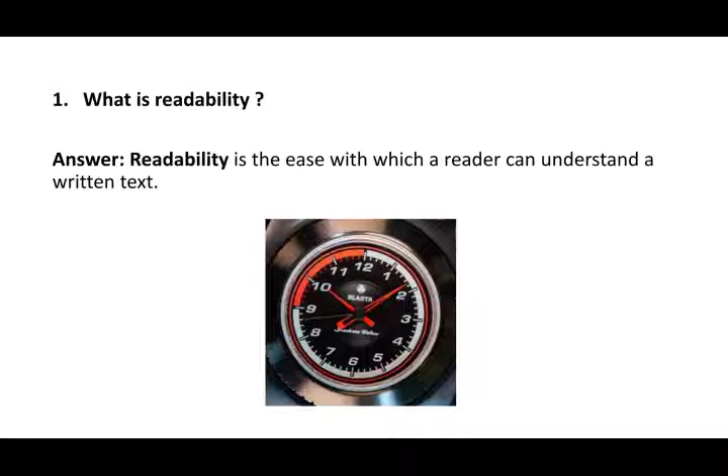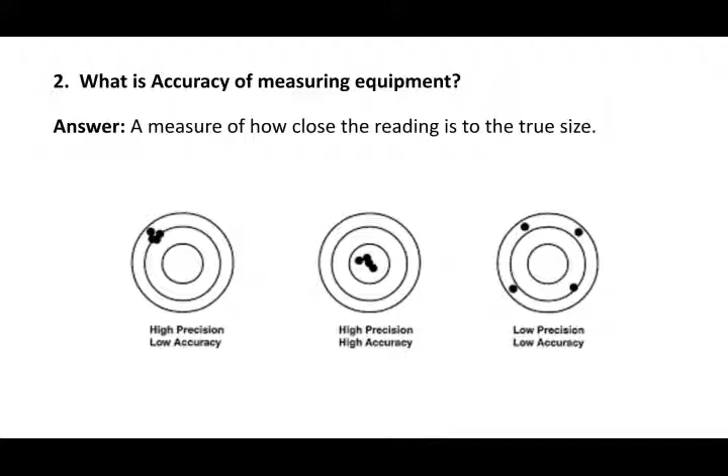Next question, what is random error? The random error in the experimental measurements are caused by unknown and unpredictable changes in the experiment.

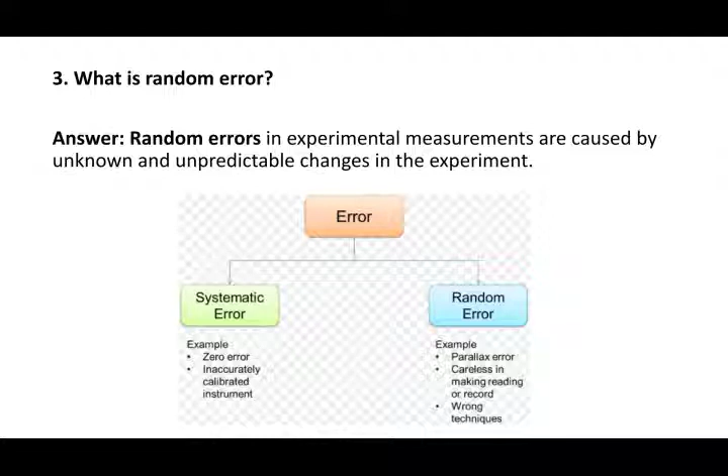In general, we can classify the error as systematic error and random error. Systematic error is due to the inaccurately calibrated instrument, whereas random error is due to carelessness in making readings or records and due to the wrong technique.

Next question, why are tolerances specified? The tolerance is specified because it is not possible to manufacture a size exactly, and that is why the tolerance is provided. The term tolerance refers to the difference between the upper limit and lower limit of the dimension.

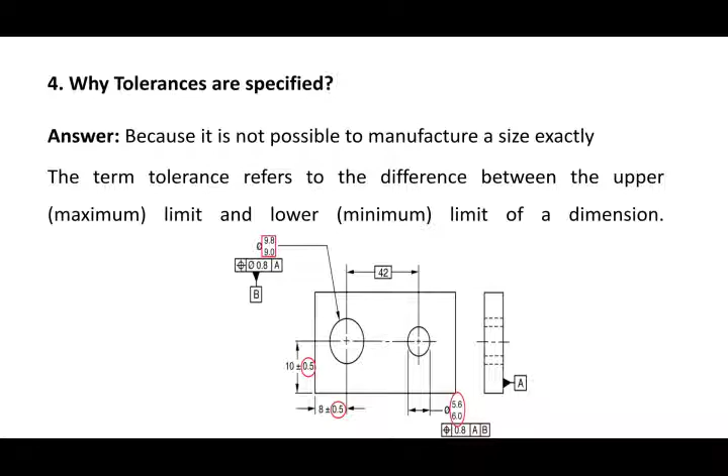Here you can see the diagram. The different dimensions are shown in the diagram. The tolerance is specified by the round circle. Here the dimension is 10 plus minus 0.5. So plus minus 0.5, that is nothing but the tolerance. The maximum limit will be 10.5 and the minimum limit is 9.5, and the tolerance is plus minus 0.5.

Next question, which is the most important characteristic of a measuring instrument in general? The answer is repeatability. Repeatability is the closeness of the agreement between the result of successive measurements of the same measurand carried out under the same condition of measurement.

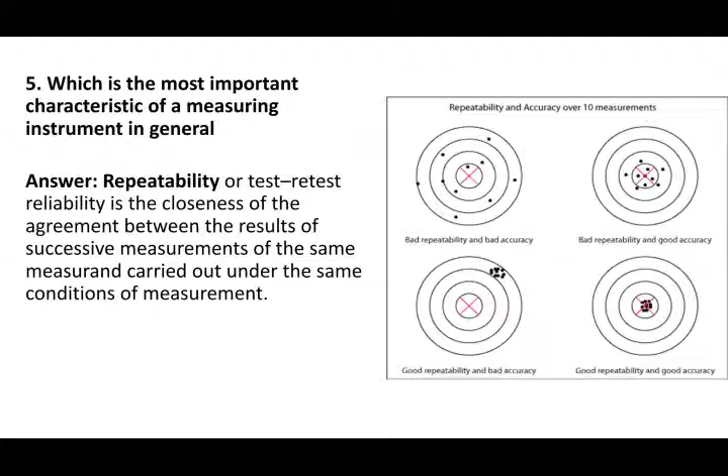In the fourth diagram, all the readings are very close to each other and they are very close to the true reading. Hence it is an example of good repeatability and good accuracy.

Next question, what is the relationship between the sensitivity and range of the measuring instrument? The relationship between the sensitivity and range of measuring instrument is an inverse relationship.

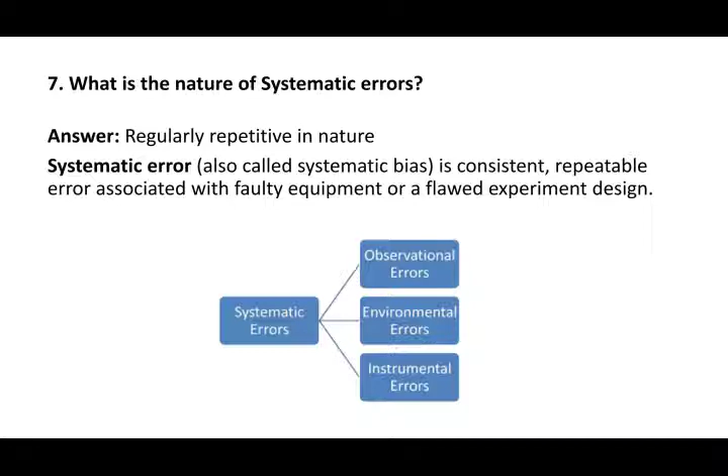Next question, what is the nature of systematic error? The answer is, systematic errors are regularly repetitive in nature. The systematic error is a consistent, repeatable error associated with faulty equipment or a flawed experiment design. You can classify systematic error into 3 categories: observational error, environmental error and instrumental error.

Next question, what is the precision of measuring equipment? The answer is the closeness with which a measurement can be read directly from the measuring instrument, that is known as precision.

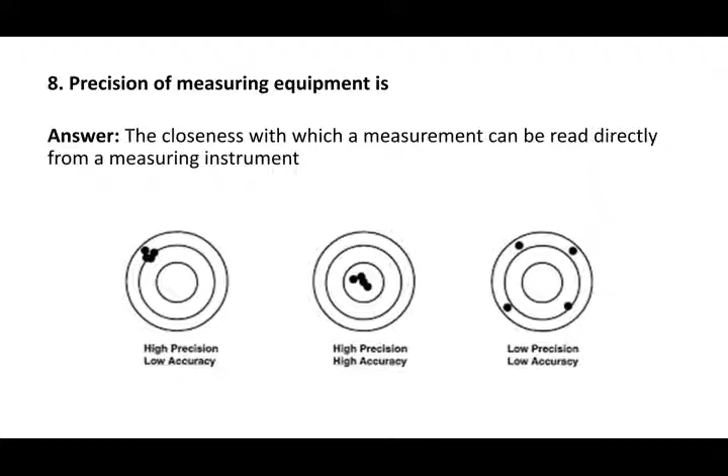Next question: which of the following instruments is most accurate? You have 4 choices: vernier caliper, micrometer screw gauge, optical projector, mechanical comparator. The answer is optical projector, which is used for measuring the profile of the gear tooth. An optical comparator or profile projector is a device that applies the principle of optics for inspection of manufactured parts.

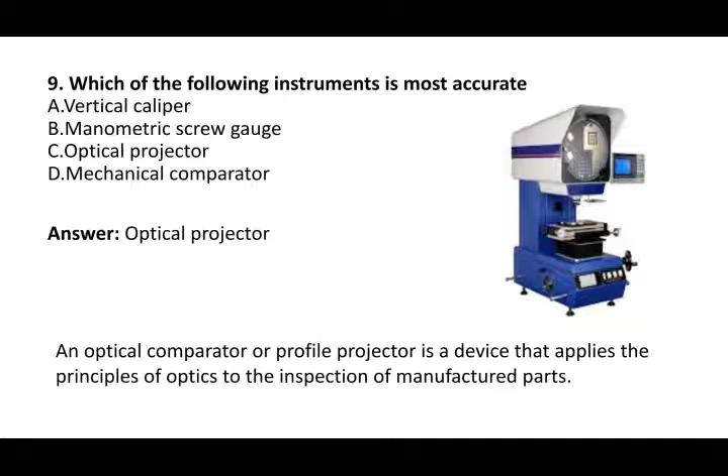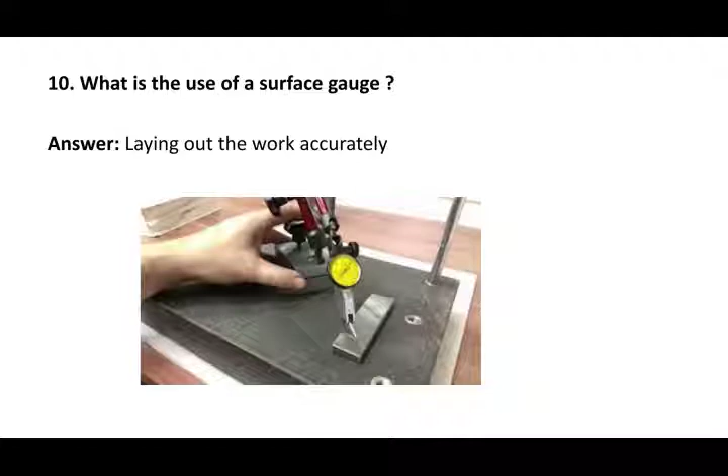Next question: what is the use of surface gauge? Here you can see the surface gauge, and it is used for laying out the work accurately.

Next question: what is parasitic error and how is it caused? The parasitic error is error in computation, the incorrect execution of the measurement.

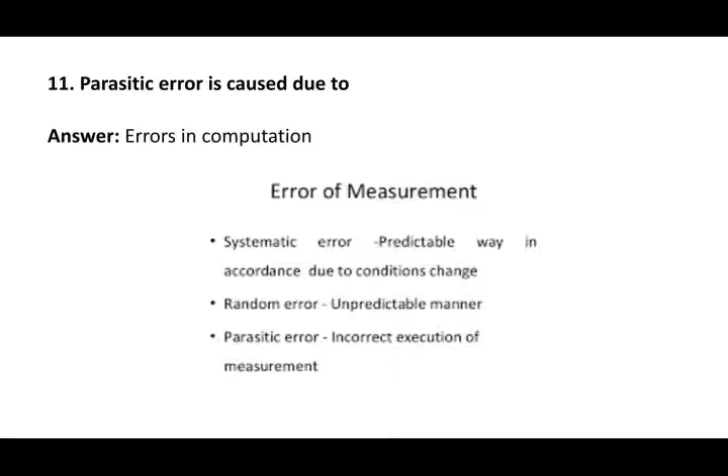Next question: what is the use of feeler gauge? It is used to measure the thickness of the clearance. In the second diagram you can see the feeler gauge, with different blades, used to measure the thickness of clearance. In the first diagram there is a clearance between the cam and the follower, which we can measure with the help of the feeler gauge.

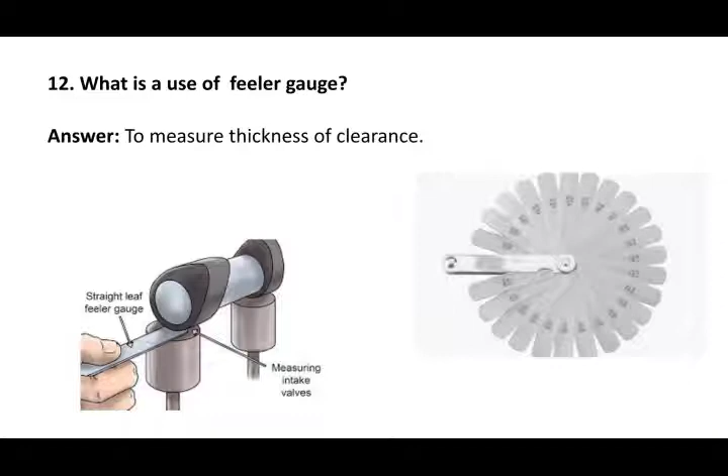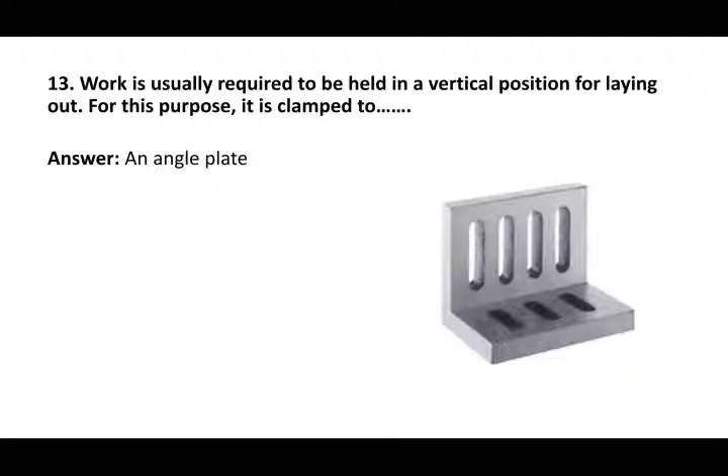Work is usually required to be held in a vertical position for laying out. For this purpose it is clamped to an angle plate. Here you can see the angle plate, used for holding the work in a vertical position.

Which device is used to check the thickness of light gauge sheet steel? The answer is micrometer. Here you can see the micrometer. The steel sheet is held between the anvil and spindle, and we can measure its thickness with the help of the main scale and vernier scale.

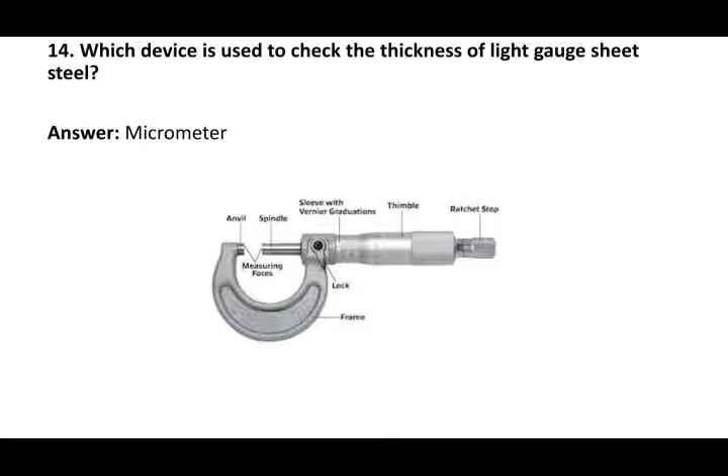Next question: what is the sensitivity of a measuring instrument? The answer is the smallest change in the signal that can be detected, known as sensitivity - a measure of change in output of an instrument for a change in input. High sensitivity is desirable in the instrument. Sensitivity must be evaluated together with other parameters such as linearity of output to input, range and accuracy. The value of sensitivity is indicated by the transfer function.

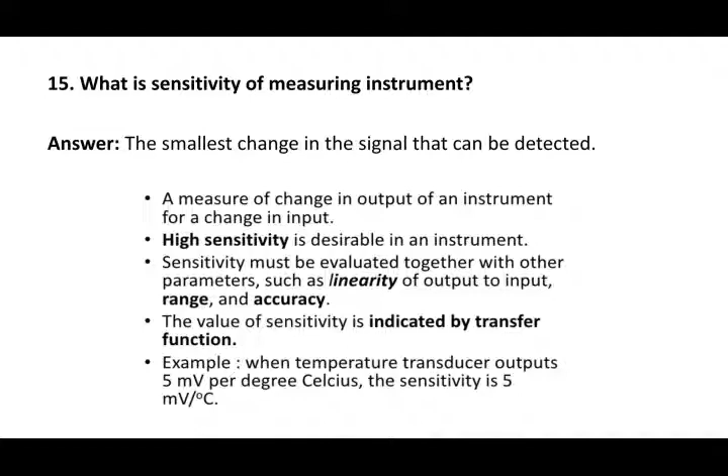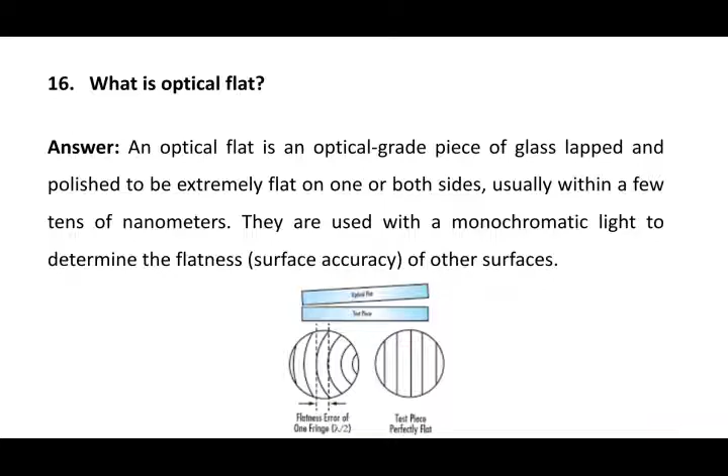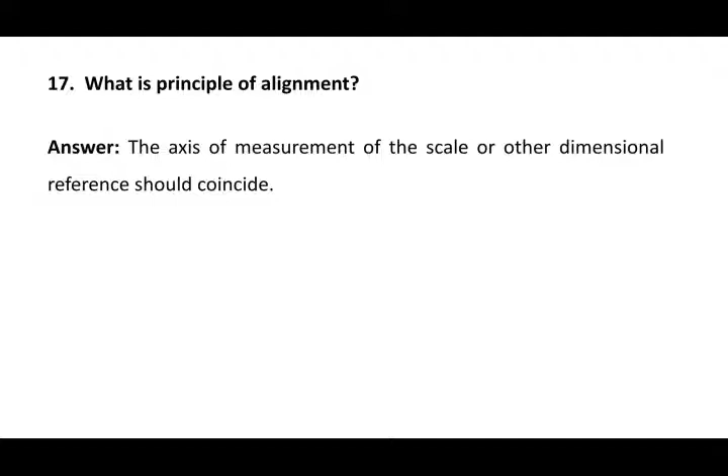Next question: what is the principle of alignment? The axis of measurement of the scale or other dimensional reference should coincide - that is the principle of alignment.

Next question: what is repeatability of a measuring instrument? The answer is the capability to indicate the same reading again and again for a given measurement - that is known as repeatability, the capability of the instrument to indicate the same reading again and again.

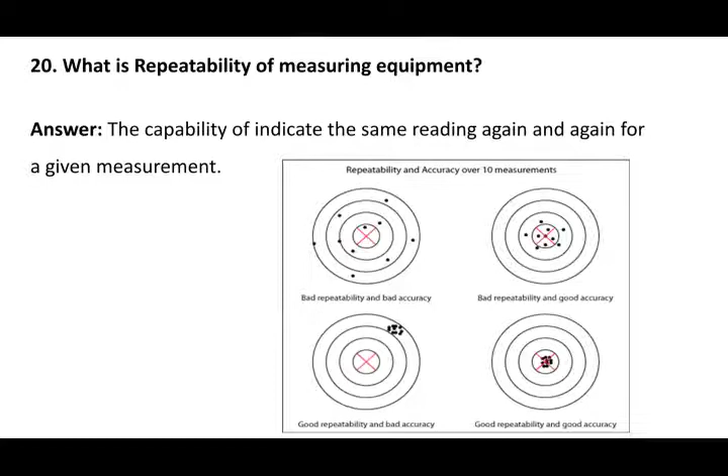What is the purpose of ratchet screw in a micrometer screw gauge? In this diagram you can see the ratchet screw, and it is used to maintain a sufficient and uniform measuring pressure. Whatever workpiece you want to measure is held between anvil and spindle, and with the help of ratchet screw we can apply sufficient uniform pressure so as to measure its thickness or diameter.

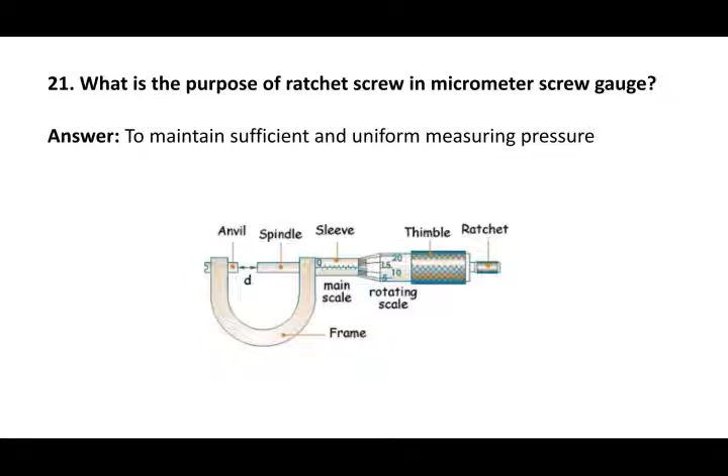External taper can be accurately measured with the help of sine bar and slip gauges. Here you can see the sine bar, and with the help of sine bar we can measure the external taper.

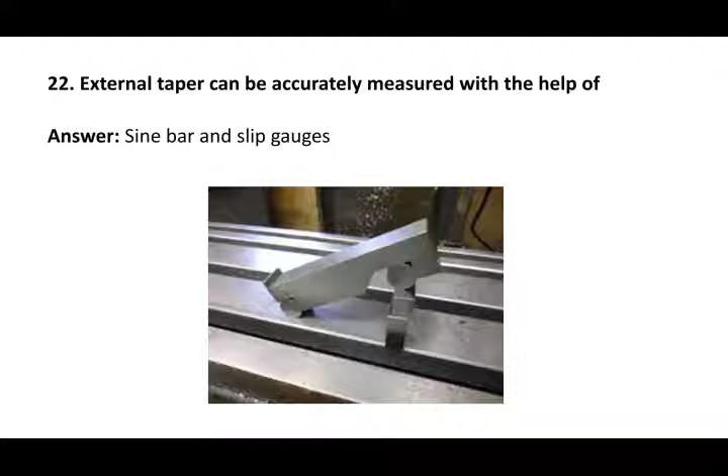A sine bar is specified by the center distance between the rollers. Here you can see the sine bar, and it is specified by the center distance between the rollers.

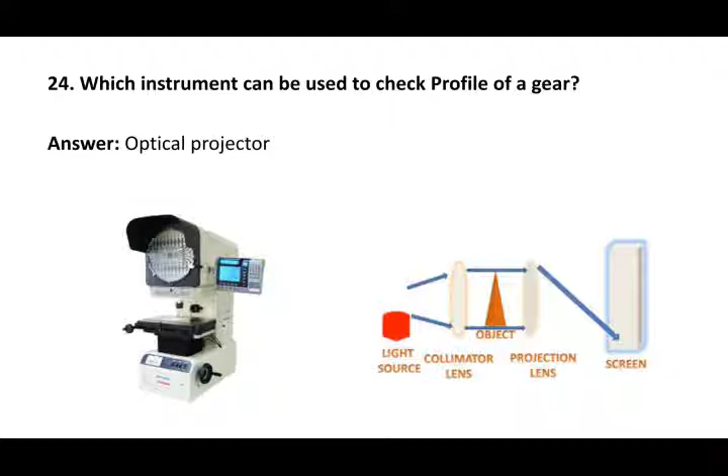The M and E system in metrology are related with the measurement of surface finish. The M and E system in metrology is related with the surface finish.

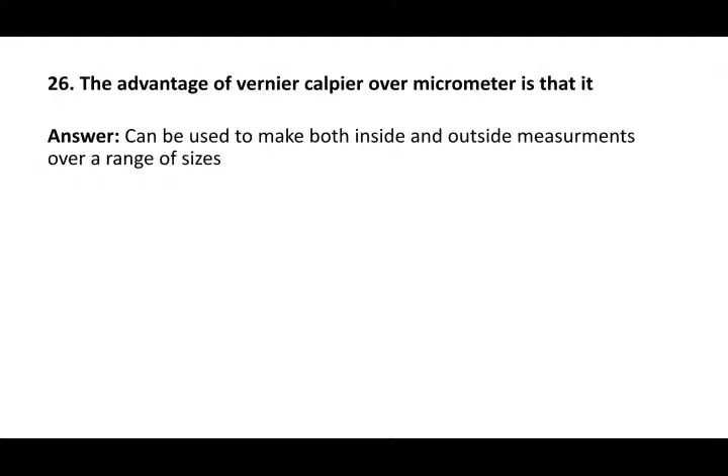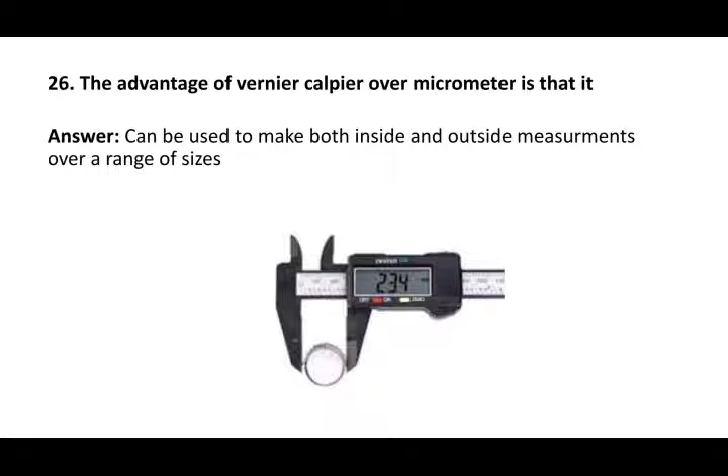The advantage of vernier caliper over the micrometer is that it can be used to make both inside and outside measurement over a range of sizes. With the help of vernier scale we can measure outside dimension as well as inside dimension. While measuring the outside dimension we hold the object in the lower jaw, whereas while measuring the inside dimension we measure the workpiece with the help of the upper jaw.

The combination set can be used to check the angular surfaces. What is the use of combination set? The combination set is used to check the angular surfaces.

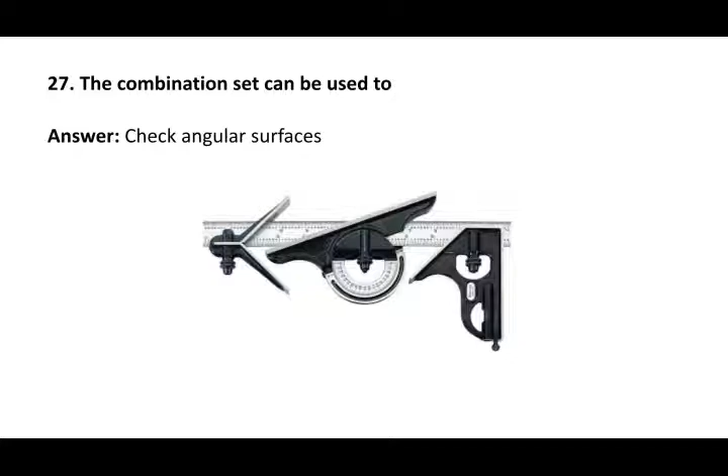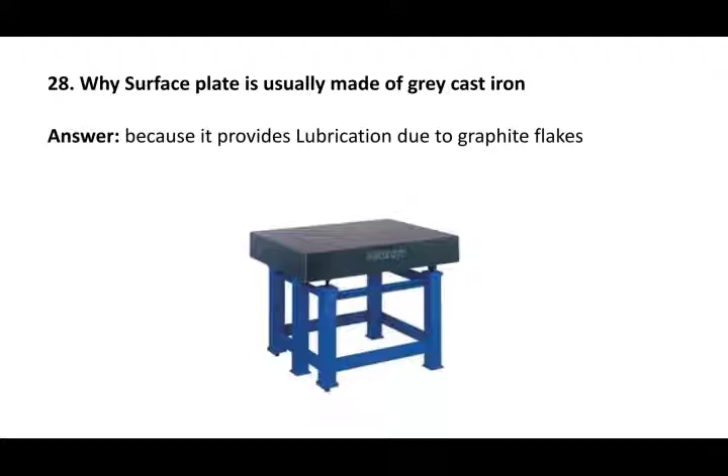Why is surface plate usually made of grey cast iron? Here you can see the surface plate, and why it is made of grey cast iron - the answer is because it provides lubrication due to the graphite flakes.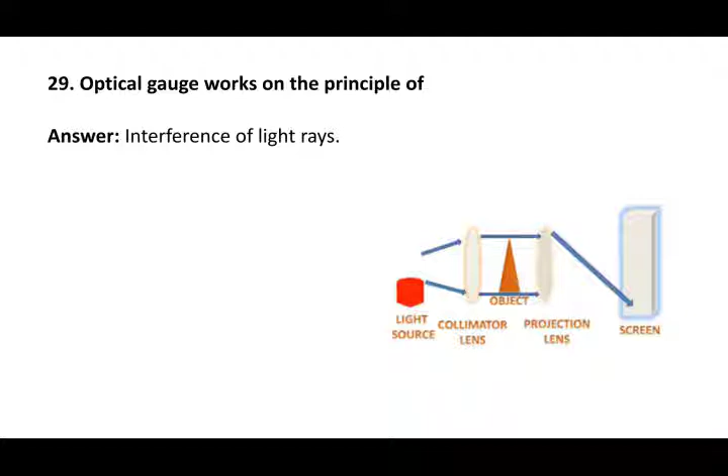Optical gauge works on the principle of interference of light.

Define the error of measuring equipment. The answer is the difference between the measured value and the actual value. So error can be defined as the difference between the measured value and the actual value.

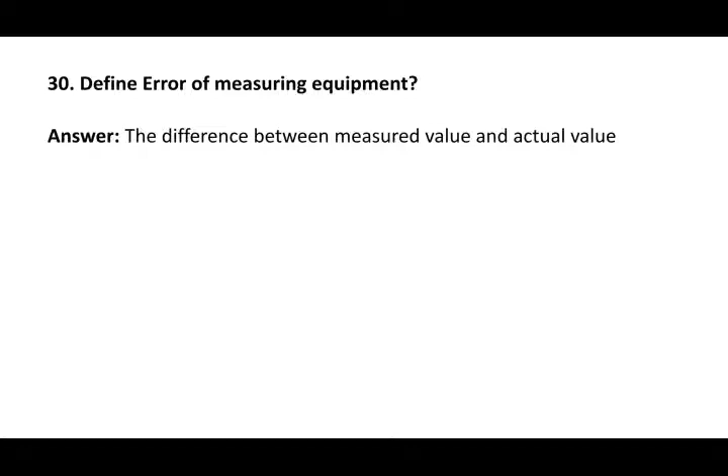What is the accuracy in the measurement? It is an agreement of the result of a measurement with the true value of the measured quantity. That means how close your reading is to the true value, that is nothing but accuracy of that measuring instrument.

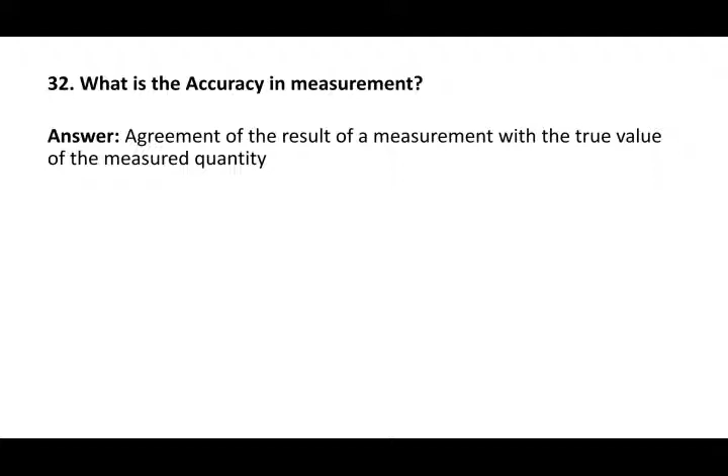How are two slip gauges in precision measurement joined? There is a process for joining the slip gauges. While carrying out the measurement activity, you have to join different slip gauges. The answer is wringing. Wringing is the process of sliding two blocks together so that their faces bond. Because of their ultra flat surfaces, when wrung, gauge blocks adhere to each other tightly. Here with this diagram you can see the wringing process, and the two slip gauges are joined together with the help of the wringing process.

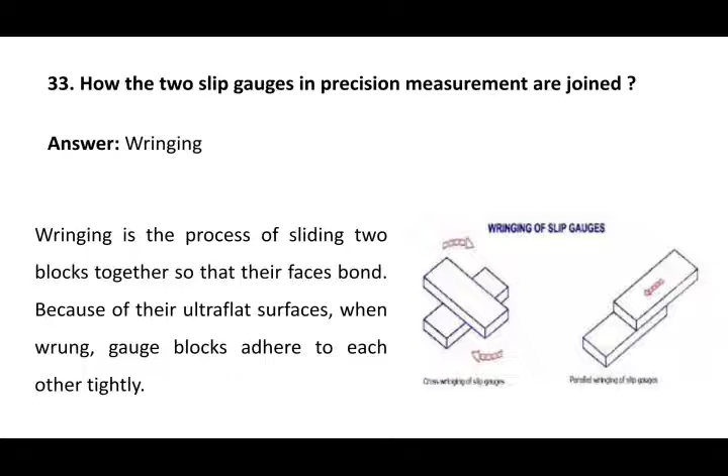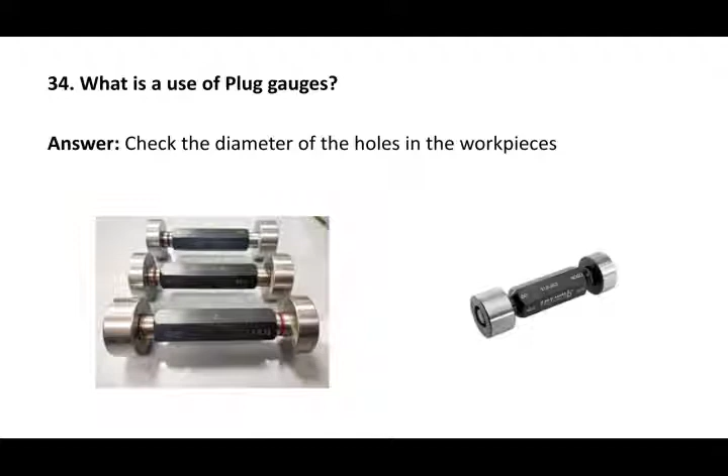What is the use of plug gauge? The plug gauge is used to check the diameter of the hole in the workpiece, specifically the internal diameter of the hole.

Define the term allowance in limits and fits. Allowance is nothing but the minimum clearance between the shaft and hole, that is known as allowance. Here in this diagram you can see the allowance.

Again, you can see the maximum clearance. The maximum clearance is nothing but the maximum dimension of the hole and the minimum dimension of the shaft, that is the maximum clearance. Whereas allowance is the difference between the minimum dimension of the hole and maximum dimension of the shaft, that is known as allowance.

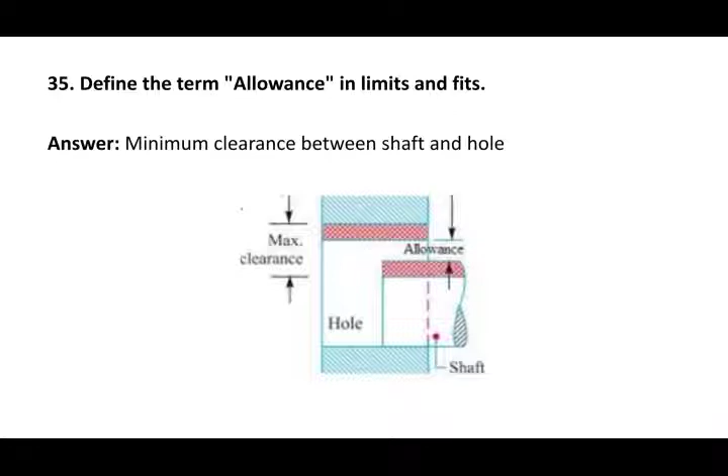Next question: the ISA tolerance system consists of the following number of quantities of tolerance and grade of fit respectively. The answer is 16, 21. So in the ISA system there are 16 tolerances and 21 grades of fit.

Next question: surface roughness on a drawing is represented by which symbol? The surface roughness on the drawing is represented with the help of triangles. There may be 1, 2, 3, 4, or 5 triangles, and depending on that triangle you have to maintain different surface roughness.

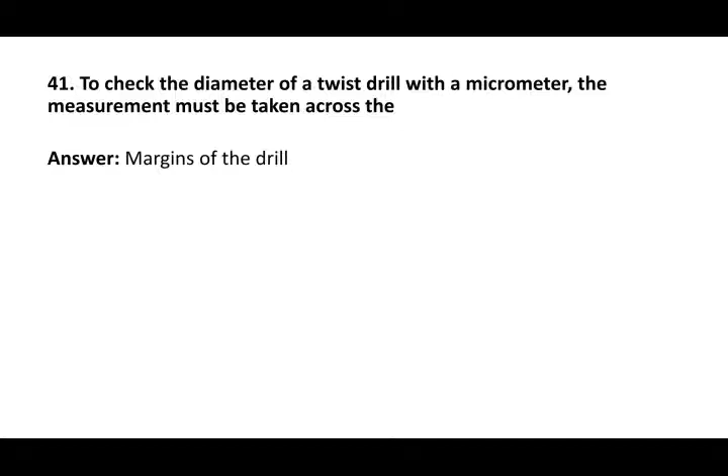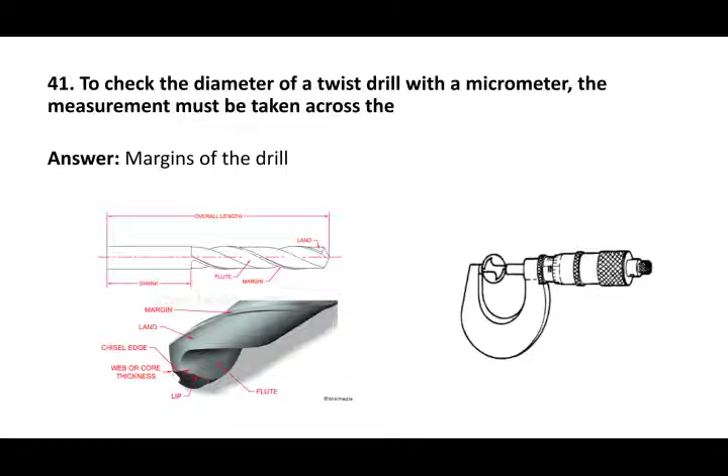Next question: to check the diameter of a twist drill with a micrometer, the measurement must be taken across. The answer is the margin of the drill. In this diagram you can see the margin of the drill, and if we want to measure the diameter of the twist drill, we have to hold the drill bit over the margin with the help of a micrometer screw gauge, and then we can determine its diameter.

Next question: straight edges are used to measure. The answer is flatness. Whenever you want to measure the flatness, you have to use the straight edges.

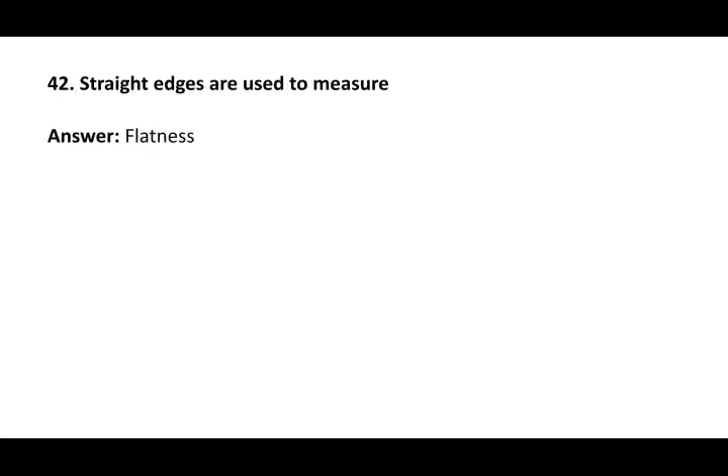Next question: what is the purpose of Eden-Roll? Here you can see the Eden-Roll, and its purpose is to calibrate the slip gauges. It is used for the calibration purpose of the slip gauges.

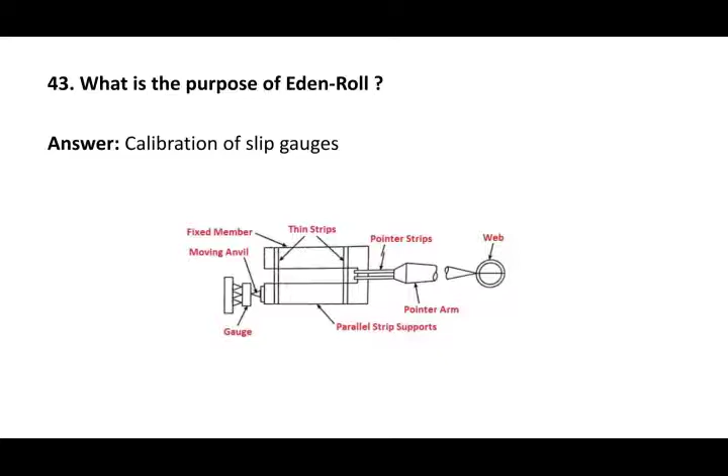Next question: what is the use of bevel protractor? Here you can see the bevel protractor. The answer is to measure the angular measurements.

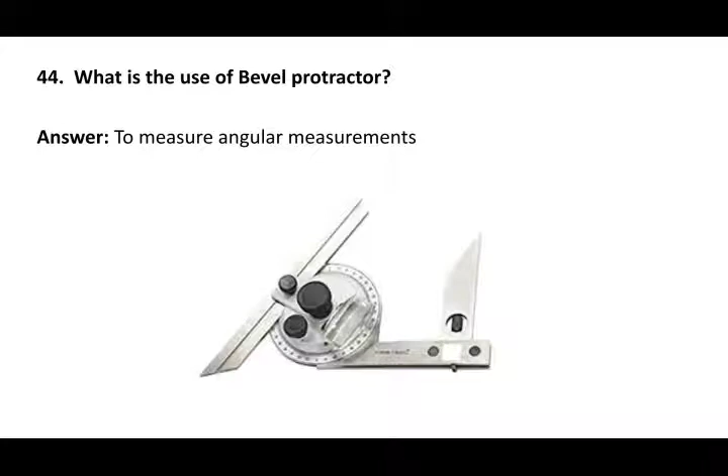Next question: what is a clinometer? The answer is the clinometer is used to measure the height of tall things like buildings, flagpoles, trees. A clinometer is a tool that is used to measure the angle of elevation, or the angle from the ground in a right angle triangle. You can use a clinometer to measure the height of tall things that you can't possibly reach the top of, like flagpoles, buildings, trees.

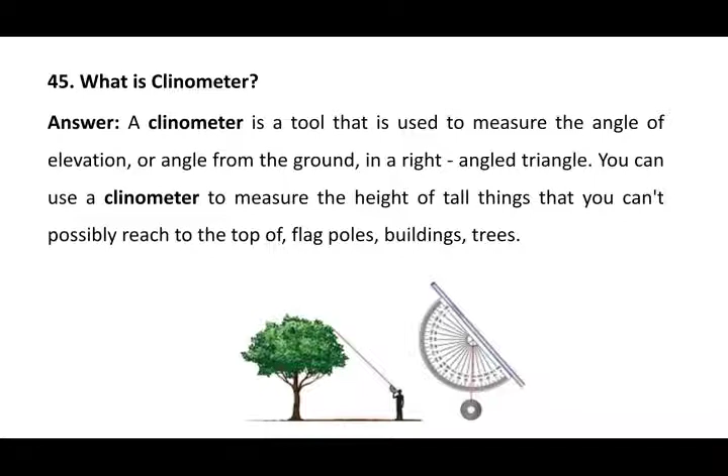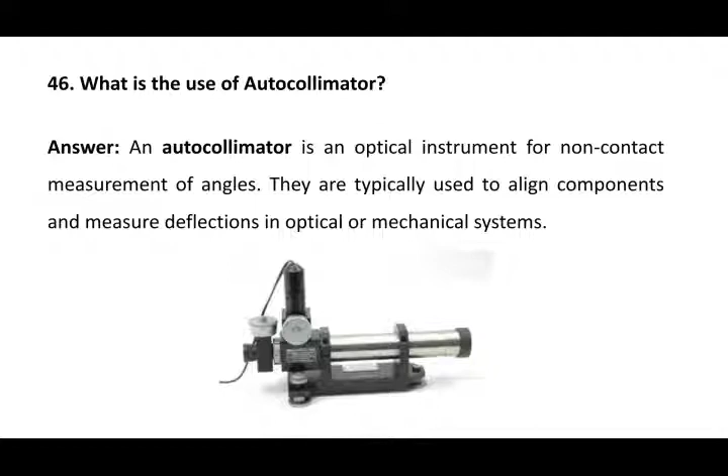Next question: what is the use of an autocollimator? Here you can see the autocollimator. An autocollimator is an optical instrument for non-contact measurement of angles. They are typically used to align components and measure deflections in optical or mechanical systems.

Next question: what is the purpose of the Wickman gauge? Here in this diagram you can see the Wickman gauge, and they are used to measure the screw threads. So the purpose of the Wickman gauge is to measure the screw threads.

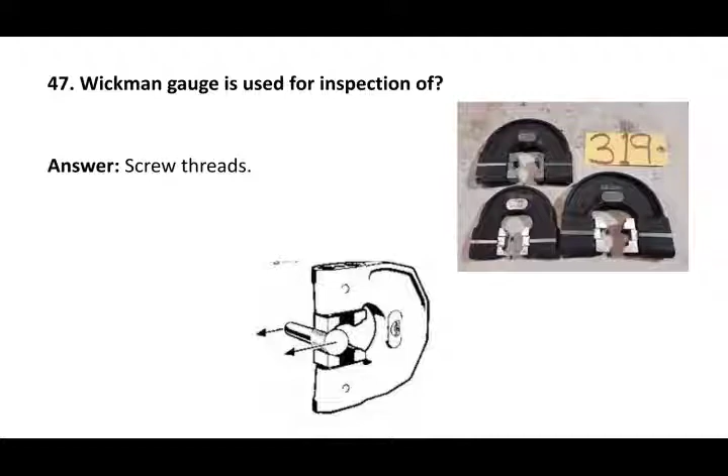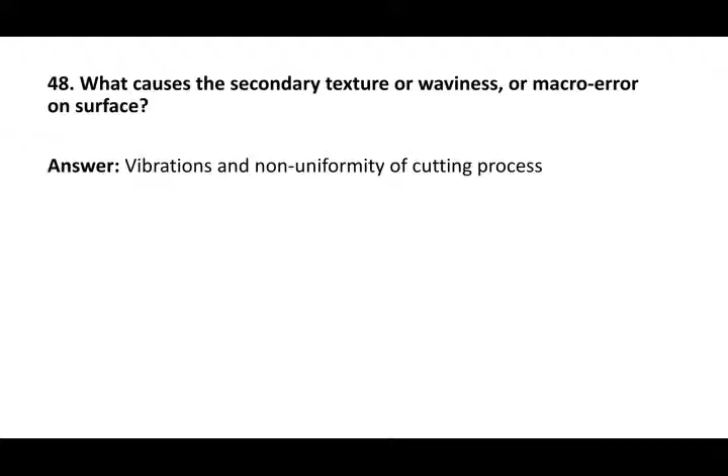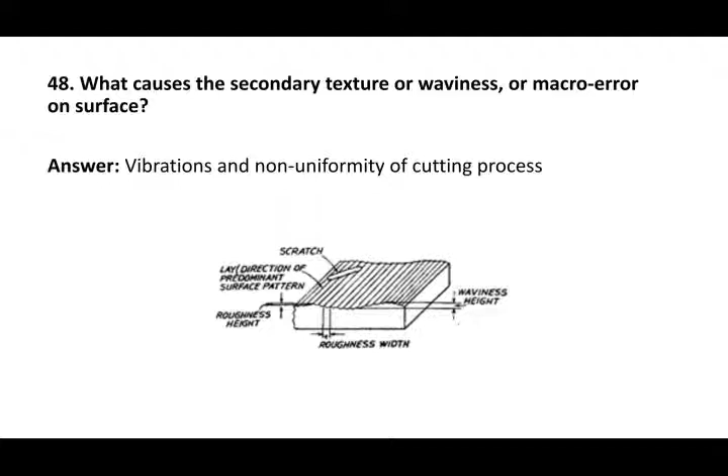Next question: what causes the secondary texture, or waviness, or macro-error on the surface? The answer is vibration and non-uniformity of the cutting process. Due to the vibrations in the machine tool, you will not get a good surface finish, and this causes waviness over the workpiece. Here you can see the waviness, and this is caused due to the vibrations in the machine tool.

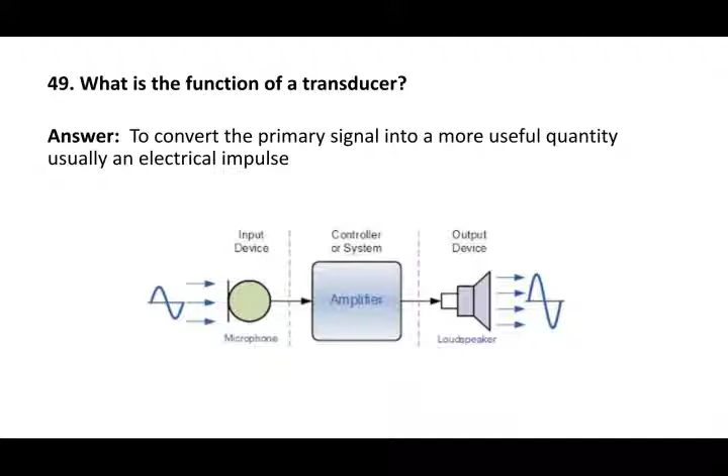Next question: what is the function of a transducer? The answer is to convert the primary signal into a more useful quantity, usually an electrical impulse. So the purpose of the transducer is to convert the primary signal into a more useful quantity.